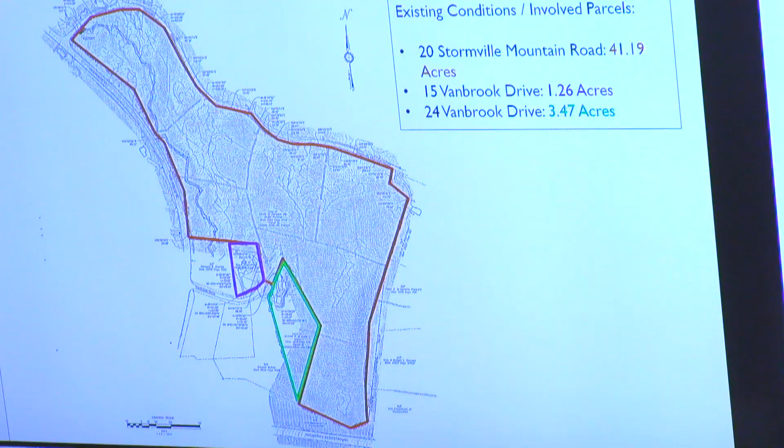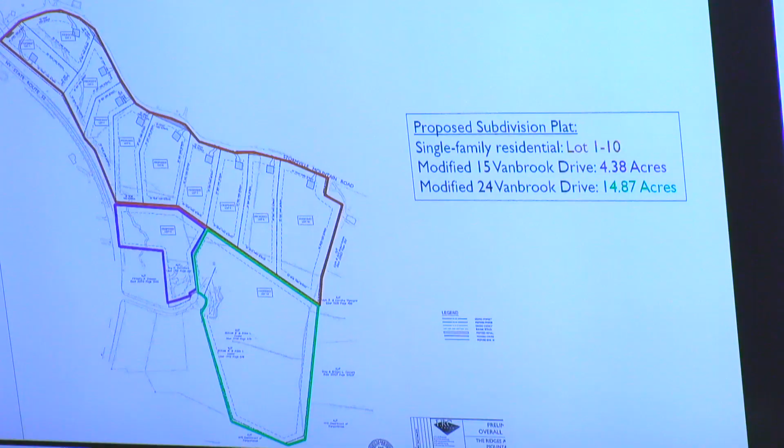Amy Patain, project planner with LRC. I'm just going to give a brief overview for any public that haven't attended. This project is the Ridges at Stormville Mountain Road, a 12-lot subdivision in the R2 district. It involves 20 Stormville Mountain Road, 15 Vanbrook Drive, and 24 Vanbrook Drive. The proposed subdivision is 12 lots, but 10 new lots for single-family residential served by septic and well, and 2 modified existing lots. The lot sizes for the new lots range from just over 2 acres to just over 5 acres.

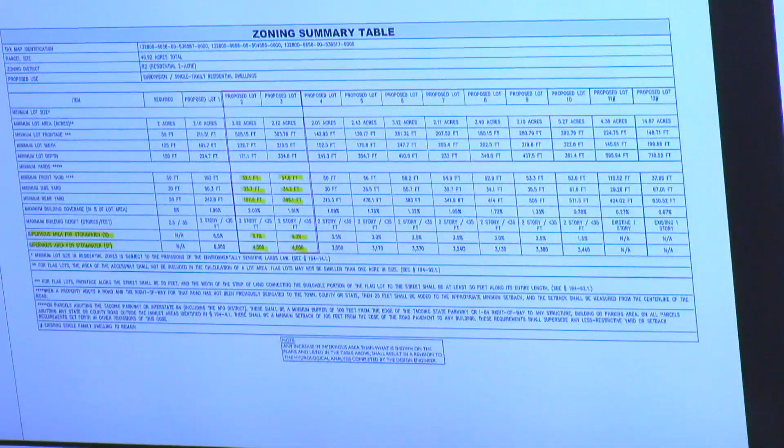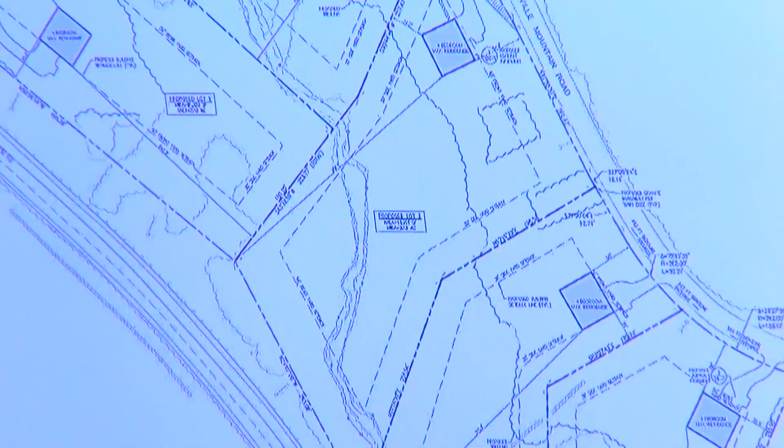Since we were last in front of the board, we received comments and responded to those comments. One change was adding to the bulk table the area for impervious surface for stormwater, as well as addressing concerns for the sight distance for lots 2 and 3 by shifting the house and the driveway slightly. There was a concern that cars parked in either driveway might block or impair the sight distance, so we did a shift for those 2 houses. That's it since the last time we were in front.

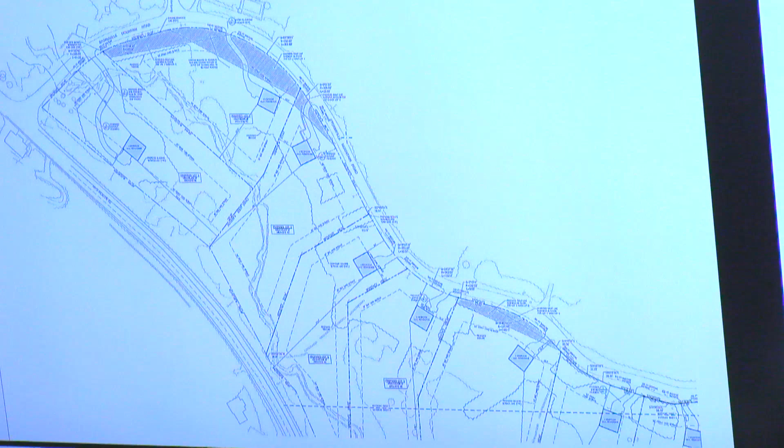Okay, excellent. Any questions or comments by board members? I'll move to the professionals. Have we had a chance to confirm the changes work for sight distance? Yeah, we've been looking at it. The concern we have is for lot 3, which requires a sight distance easement across pretty much the whole front yard of lot 2. It's a pretty considerable area, something we haven't seen to that extent in the past. So that remains a concern, and we're hoping they can continue to work through that.

Okay, any other comments or questions? I think that's something we can deal with in future meetings. In the meantime, just to remind the public, at our last meeting we passed a resolution to permit some limited tree clearing to start work on the sight distances, as well as to get access to a well, or two lots, two wells.

And then we adjourned the public hearing, but we've reopened it. So are there any members of the public here to speak for or against the project? Okay, if not, then we can further adjourn the public hearing to a date in the future to be determined. At your desire, you can let the planning department know when you're ready to come back in.

Does that probably work? The next step is to iron out this sight distance easement, and we can do that offline. Would there be no option to close the public hearing, or does the board not feel comfortable moving forward with that?

There were people here for the public hearing last time, and I think it got a little confused when we closed it. I would be concerned about closing it right now, because I think maybe they felt as if we were adjourning it to a later date. So perhaps we confused a few of the people that were here who wanted to speak about the project. I think it will be a limited number of comments, but I think we need to keep it open for at least one more meeting.

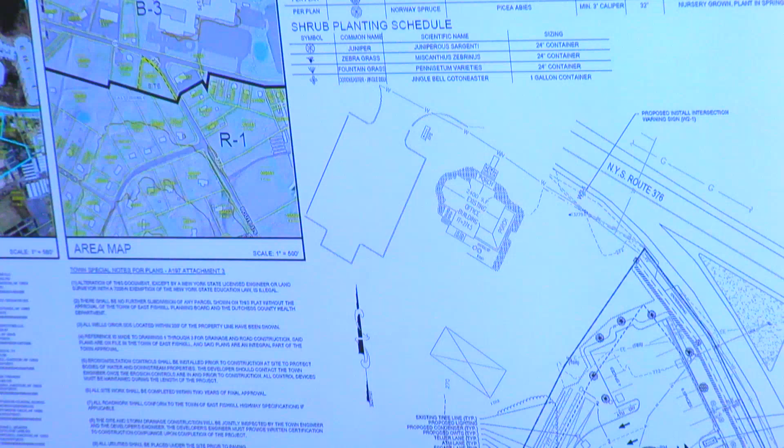All right, I think I got it here for you guys. This is the TEG site. This is right across from the Blue Fountain Restaurant, right across from Van Wyck Junior High. I'm just gonna try to get this a little bit here so we can see.

I was involved with this application a couple of years ago, where we were in front of the board. We were in front of the board a couple of years, probably 15 years ago, early 2000s, with this site. We had a restaurant and a commercial retail building in the back, parking in the front, and it was also coordinated with our old office next door with parking easements and whatnot. But essentially, almost the same configuration. We spent a lot of time with DOT back with that old site plan, having the entrance across from the Blue Fountain Restaurant. So basically shook the rug on that old site plan. Now we've refreshed it with a new applicant.

It's going to be the TEG Federal Credit Union. It's a two-story building, so the thought process is they have a couple of rentals. They'd like to consolidate and own the building. So there would be teller space, your typical credit union action downstairs, and then upstairs there'll be more of a mortgage office type of establishment where there'll be a couple of employees.

Looking at the building, they've followed their same motif with the architectural style. We've tried to update our architectural plans based upon a meeting with the town planner, with the new architectural guidelines. We'll bring those up in a minute. But we've done a lot of legwork with the town and with the applicant trying to get to this point. Again, this is our initial presentation, but parking in the front, offices upstairs, retail, the teller aspect downstairs.

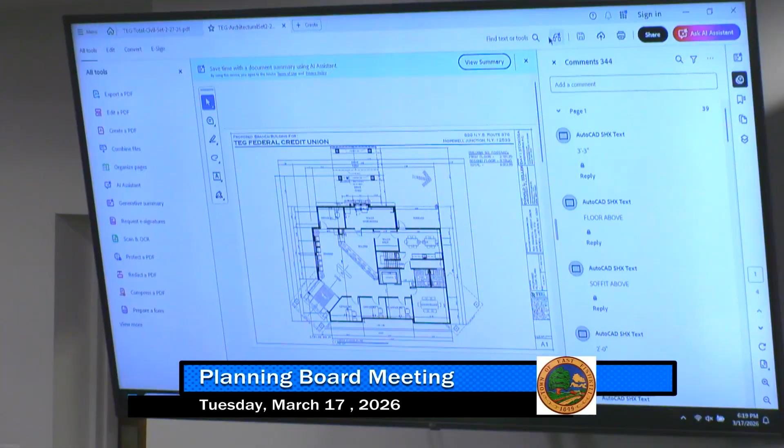As far as architecture goes, I'll just give you guys a heads up here on what Mr. Zeller's put together. He's the architect, and he's here tonight.

So this would be the front of the building. This entrance here is coming into the parking lot, and then you work your way through the building, and this would be the entrance toward the existing attorney building that's next door. It has that feature that TEG has with their building style, and we've tried to incorporate some of the architectural features here. The total height of this is 32 feet. Your first floor is 2,800 square feet, and the upper floor is a little bit bigger because we have those areas above the entrances and above the drive-through area, to about 3,500 square feet.

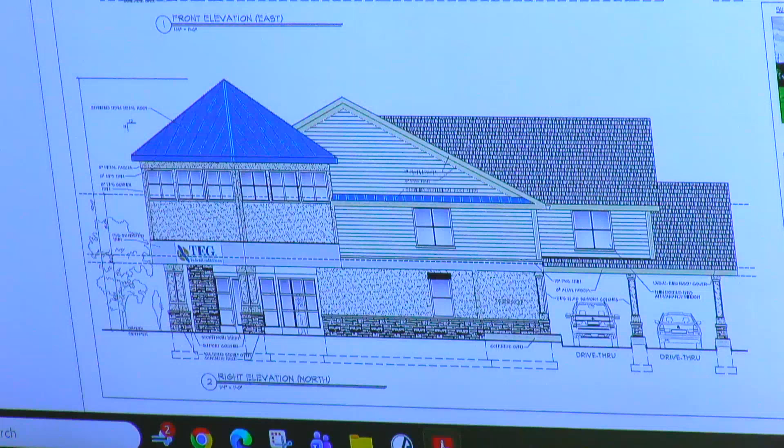We're doing some cultured stone along the bottom, standing seam roof, some architectural shingles, and then some EIFS on the lower level. The hope is to have some input from the board tonight on the site plan and architectural style, and ultimately pivoting over with the board's blessing to the ARC to get some input from their board, and hopefully we can come back over in the near future to this board and advance the project forward. But that's my gist on the site plan.

Stormwater, we're going to be under an acre of disturbance, so we're doing subsurface stormwater treatment in our front parking lot. And septic will be on site with a small pump chamber and some infiltrators. That's it.

Okay. Questions by board members, or comments? I guess one of my first concerns would be the traffic study. Do you have the comment letter from them, or any of that information at hand?

HVEA did review the comment letter, the traffic study, and came up with a series of comments. We've forwarded that to Colliers Engineering and they had some input back. But at the end of the day, if you look at what DOT said, the traffic study as submitted had 3 revisions. It was actually reviewed 3 times over the last year before we could come to this board, because we were technically in a moratorium. So we did a little legwork before we came here to ensure this was a viable project for the applicant to continue in contract.

We didn't prepare the traffic study, but we forwarded it to them. From what I'm told from Colliers, they will be preparing a response to it. And what's brought up in this is minor in nature, technical in nature. Yes, but still need to work through it.

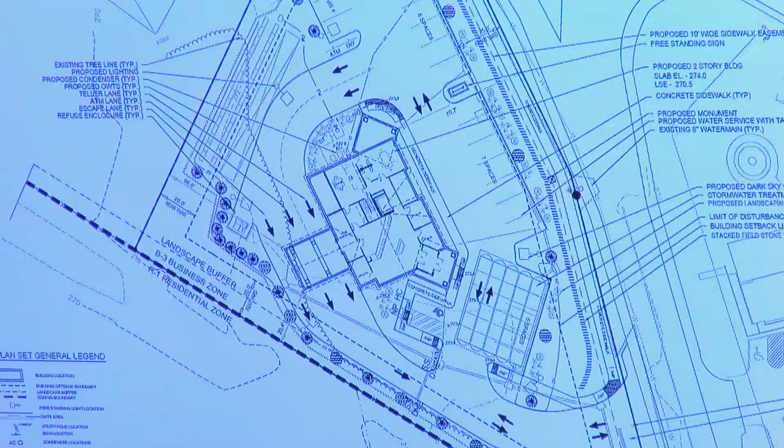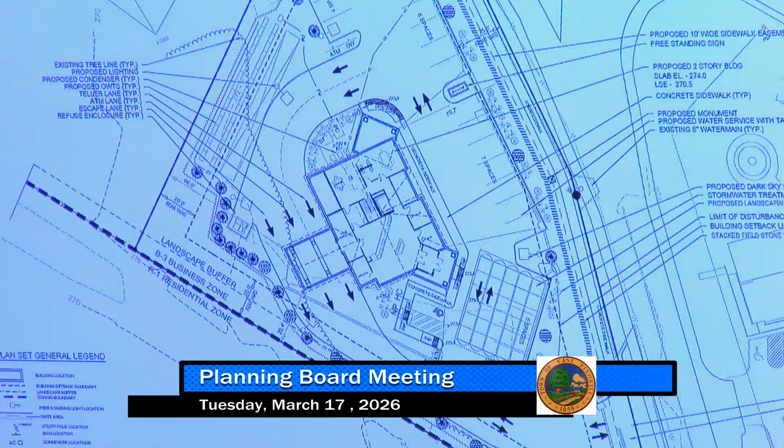Okay, so the next thing I was looking at, I see the back of the building - is that an overhang like for the drive-through? Yeah. So there's no accessibility for fire apparatus to get around that building 360? There's an escape lane on the side, 12-foot wide, 15-foot clear - standard clearance for a commercial access. If you want the ability to drive a fire truck through there, we'd probably have to expand that slightly. But it can handle a pickup truck, sedan, that type of vehicle.

So it would impede the buffer zone, then? Correct. Okay.

So those would be my two finer points I see immediately - traffic is definitely one, I think it's very difficult when school's in. Between the bus traffic and the parental traffic, I don't know why, but it seems like a ton of parents drive their kids to and from school. I used to take the bus when I was younger, but when I drive through there in the morning and get caught in that, it's a zoo, it's unbelievable. I think the one thing about this site is our peak hours are slightly different, especially in the morning - this is more like a 9 o'clock operation. Yeah, and bus traffic around 7 o'clock, it's mayhem.

So have you reviewed the plan to give comment yet? Yeah, I wasn't at our last fire advisory board meeting, but they did submit our recommendations to Jackie. One of them was to be able to fully access around the building. The others addressed sprinkler systems, Knox box, our standard items.

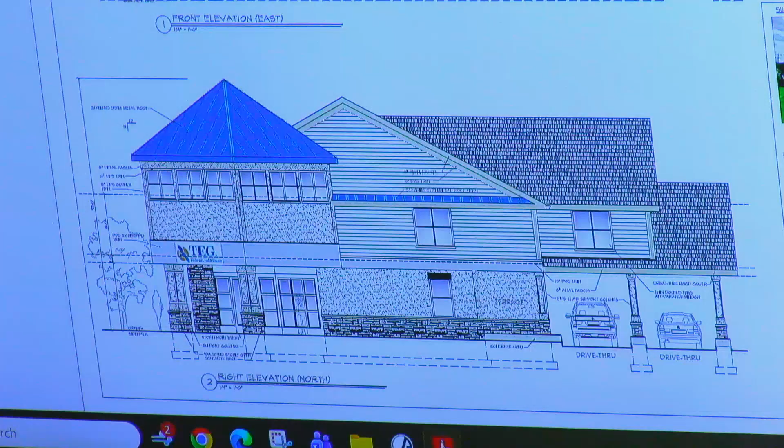Okay, so we want to see as low as possible, and we don't want to see like indoor lighting levels under that canopy that spill out everywhere. Right, you and I have been out multiple times looking at lighting. So, all right, you're not quite there yet with that, but we'll look at that when you provide it.

So we have to refer to the ARC. We should declare intent to be lead agency. Yes.

And then Matt Rickett mentioned that you guys are maybe getting a new fire truck of some sort. Do we have the dimensions of that yet? And has that been provided, do we know, Brian, if you used those? I don't know if he got it, but it was turned in last week to Matt, and it was supposedly in all the package you hand out now. Okay, so we just need to make sure you have the latest dimensions of the newer truck. Yeah, they're pretty standard. We'll run the turning analysis on it.

All right, I think that's it for right now. Okay, well, so we'll do a little business.

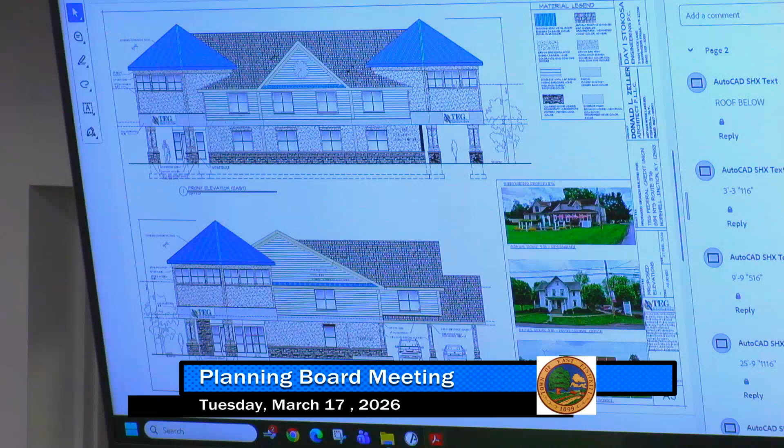Just a quick note on the aesthetics of the building. In my humble opinion, there's a lot of residential-looking buildings in that area. The school across the street is about to go through a massive renovation. I would love to see a much more neutral feel to the building, more aesthetically matching some of what's going on in that general area versus a very loud, bold color scheme, if possible.

If there are any renderings of what the junior high is going to look like, I would really like to have those, because I would definitely like to have our building look good with everything surrounding it. Yeah, I agree. Great, thank you.

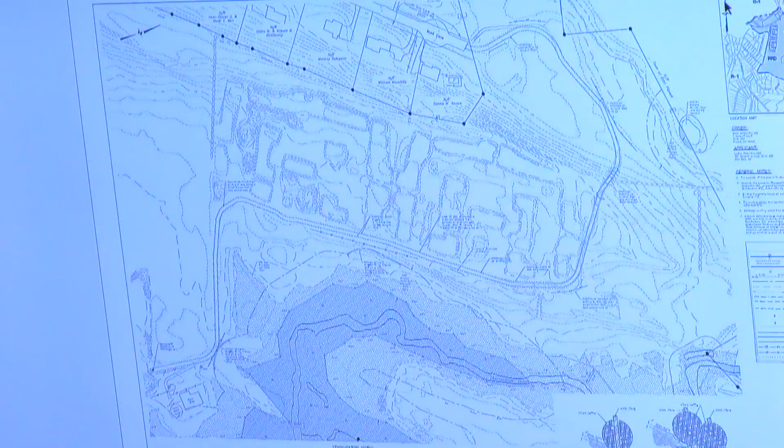Good evening, for the record my name is Rich Williams, and I'm with Insite Engineering. What you see before you is the area where we're going to be working on site. This isn't the full site or the full 100 acres.

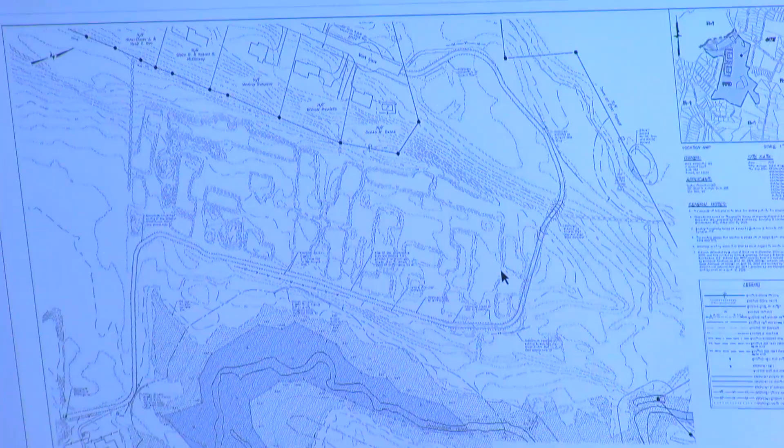On the top of the page you can see the cul-de-sac for Mark Lane. It doesn't end in a cul-de-sac, actually there's a gravel extension that goes to our property line. On this plan, this is the well access path we've met on site and been working with the town to utilize. We didn't pick this path out of thin air, we thought it was the most sensitive way to enter the property.

We do have frontage on Route 376. However, it is separated from this portion of the site by the Shenandoah Creek and a large DEC wetland. There is an existing bridge crossing, but the area between the bridge and Route 376 has revegetated and reestablished as DEC adjacent area, and would require clearing and working through that area to access the bridge. We'd also have to vet whether that bridge is even structurally sound, given its age and lack of maintenance. So there's a lot of environmentally sensitive land to cross that way. We didn't think it was a feasible route to explore.

What we did note, though, is there's an existing trail that comes off the end of Mark Lane, down through the site and around this area of the property. The reason you see the topography have such boxy shapes in that area is that's where all the original foundations were excavated, and those are the topographic remains of that. Along the southern end, or really the eastern end, which then runs north, there's an existing dirt access road that was built back in the 80s or 90s when construction was underway. That's what we're proposing to use.

We will have to regrade a couple of sections of it, and widen it a little bit in certain areas just to make sure it's safe and accessible for a well rig. But the idea is to be as minimally invasive as possible. As David said, we're thinking approximately 5 to 6 trees may have to be removed along the entire route.

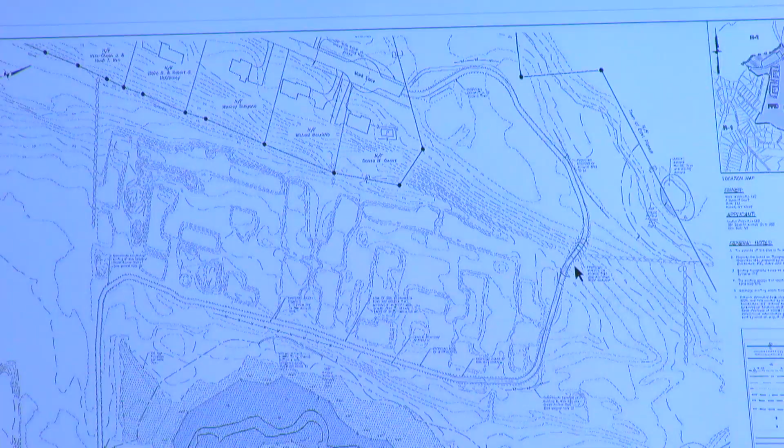This is also an operation where we bring a well rig in. We'll be bringing supplies down to the well rig with smaller equipment, but once the well rig is set up, it doesn't come in and out. It comes in, drills the well, and then leaves. So we've worked through proper erosion controls, and made sure our disturbance stays under 1 acre. We really think, as far as being able to use existing features on site, being as least impactful as possible, and still getting the information that's helpful for the town to know and for us to know, to make sure the well tests done decades ago are still accurate and adequate, is important.

This might be the appropriate time for me to ask a question that occurs to me. Can you walk through a timeline of what will occur, by day if you will, with regards to this project, and what kind of equipment and vehicles are going to be coming in and off the project? And what's going to happen to that road afterwards? Because I know a lot of the neighbors were upset about potential traffic going through the neighborhood.

Let me answer that one first, because we want to emphasize this. We put it in the letter, but we want to emphasize it: that's, as part of the ultimate proposal, going to be an emergency access that's gated. That is not going to be a through street at all. So there's only going to be one exit in and out of there, coming off of 376? Coming off of 376 is one, yeah. And how far back does that go? Because isn't there some rule that if you go back a certain number of feet, you need a second entrance there? Well, that would be the second entrance, it's just an emergency entrance.

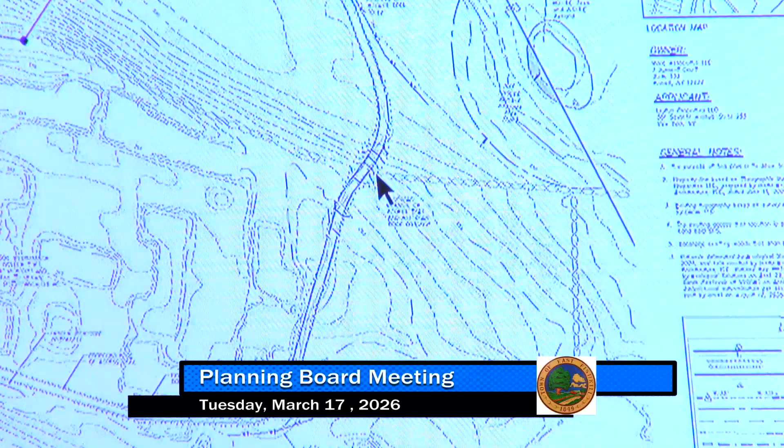There was one section of rock that this might be better for. So I think the area you're talking about, sorry Dave, is right in here. There's one area of steep section, and I'm a little surprised, because I know you've walked with our staff, we've reviewed this trail numerous times together.

Well, I walked it one time, so. But we've had this plan in front of you for 5 or 6 months, and at the same time, when I say we were on the 1 yard line, I think we were very close to getting the okay to drill.

So, what I will tell you about the work, and the reference to a goat trail - there is an existing 8-foot wide, in most places, dirt and gravel road. We'll be widening it to 10 feet for the majority of it. In this area we'll have regrading, and that is the area 430 feet from the nearest property line. It'll just be regrading out that slope, as I mentioned in the initial presentation, to level it out - not make it completely level, but take a slope like that and just reduce it so we can get the well rigs in and out.

So you'll be bringing in construction equipment to do the grading, and then I presume some material as well for the roadway? Yes, we're going to bring in a little bit of item 4 for the areas where we're just going from 8 to 10 feet. We're going to see what we can use on site as we cut the fill to try and regrade that small area out. But yeah, there will initially, prior to the well rig, be a small backhoe and maybe a small bulldozer coming in.

And you referred to the width of the existing trail - different things - but it's 8 feet now? There was, yes. And you want to bring it to 10 feet, am I to understand? And then would you be removing any fill from the site? No.

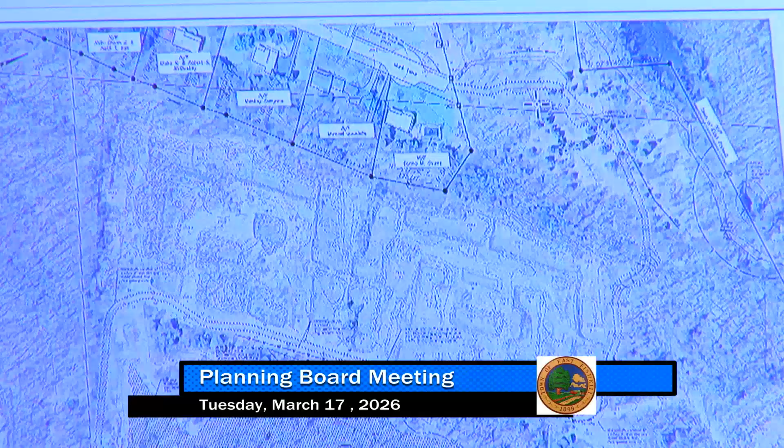Why is that not the better option, going back to the original statement? I'm sorry, I didn't mean to interrupt. That's okay. Why is that not better? Because I think we'd end up taking more trees, and I think it would create a visual corridor.

Okay, it'd be a little so different. My question with all of this, big picture, is: if you were given access off of Mark Lane, does this not open a whole can of worms for future site work to be accessed from there, because it's easier and effectively cheaper than accessing the site the proper way? In my opinion, by avoiding the proper access off of 376, we're just opening the door for you to access the site this way for the entirety of all of the site work and the beginning of construction.

Well, that's the purpose of the EIS, though, right? Because part of the EIS is studying construction. So if we were to propose - and I don't believe we are - but if we were to propose to send everything down Mark Lane, your board as the lead agency can say, we believe that's an adverse impact, and in order to mitigate that, you need to go off of 376. But we're not there yet for this, right? Because this is just the testing that this board told us to do.

Right, I mean, what's a little odd here is, in my over 20 years of practice, I've never had an applicant come to the board and say, hey, we want to do a test, and the board is saying, no, don't do the test. But in this case, I don't think anyone's saying not to do the test. I don't think that's what we're saying.

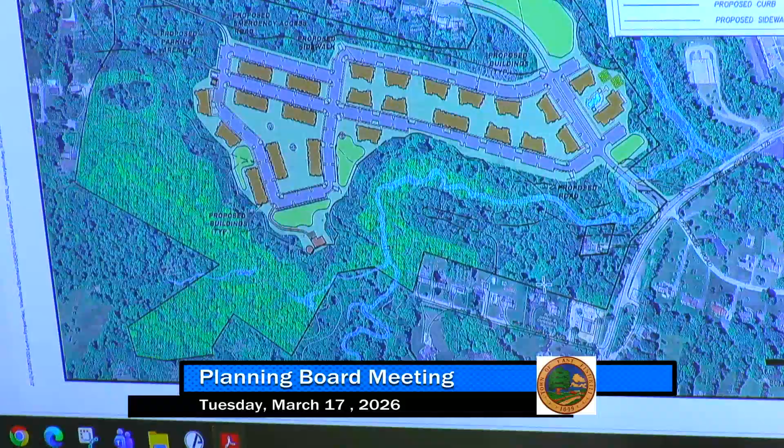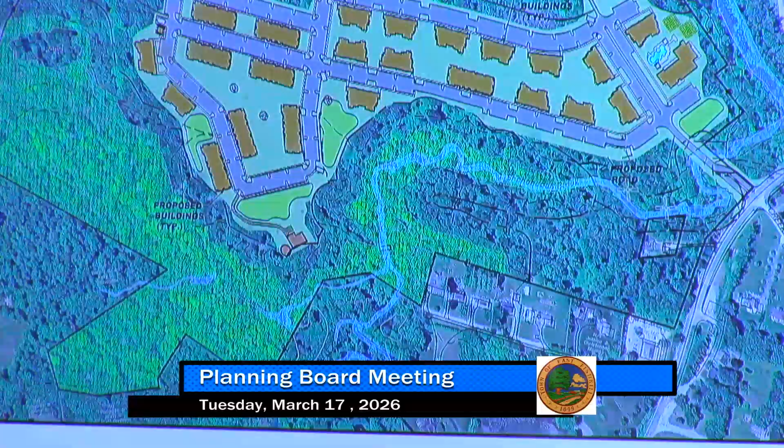Again, I think that's a conversation that has to be had with the DEC. Well, fine, but that's a different issue that was before the board tonight, right? The way that NPV phrased it is, do we do it now or do we do it at the FEIS?

Testing has to happen. Question for Michelle, maybe Michael. At what point does an adverse impact get triggered before we determine the other adverse impacts? So the traffic, the construction vehicles, that's just the first part of the site study. There's other things and other reasons for them to access the site before they can put in their access from 376, the new access, not the existing one, because I understand that's also impactful.

At what point is it an adverse impact to determine if it's an adverse impact? Wait, hold on. The legal issue here is this an action? From a SEQRA perspective, and I know the attorneys will weigh in, but from a SEQRA perspective, the question is this an action? Accessing the site, is that the question? The testing, no, it's not an action. There's no permit needed.

We've gone through the process to get the methodology approved, just like SEQRA, there is a handbook. A permit is required to drill this third well. When you say there's no permit required, but...